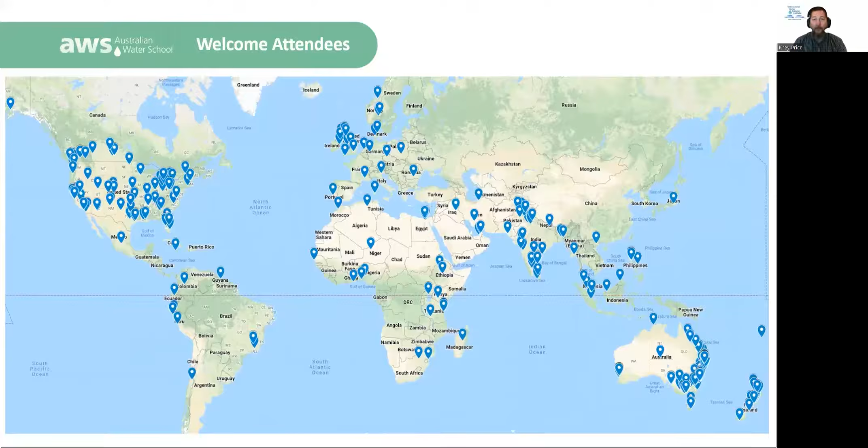We've got Ben and Carlos. Ben, Carlos, if you can turn on your cameras and say good day. What we'd like to know from you is, first of all, what's your background? What do you do? How did you get into this field of providing advice around flooded roadways? And let us know where you're coming to us from today. First, over to you, Ben. Hi everyone, thanks for joining us all. I'm from the Water Research Laboratory at UNSW Sydney, and I'm fascinated by anything to do with water, coastal hydraulics. I do a lot of work in those areas, and we have a team of flood specialists here. It was a really important part of our work to contribute to what happens to vehicles in floods, and helping ensure the safety of people around floodwaters.

Excellent, thanks for that. Over to you, Carlos. Let us know a little bit about yourself. Hi, how are you everyone? Thank you for the invitation to Australian Water School. I'm a hydraulic engineer working at the Queensland Department of Transport and Main Roads, and obviously floodways and low-lying crossings are part of the scope of work here. I've been around for a while, originally from Mexico, but I've been here for 20 years working in all sorts of hydraulics - bridges, floodways, dams, etc.

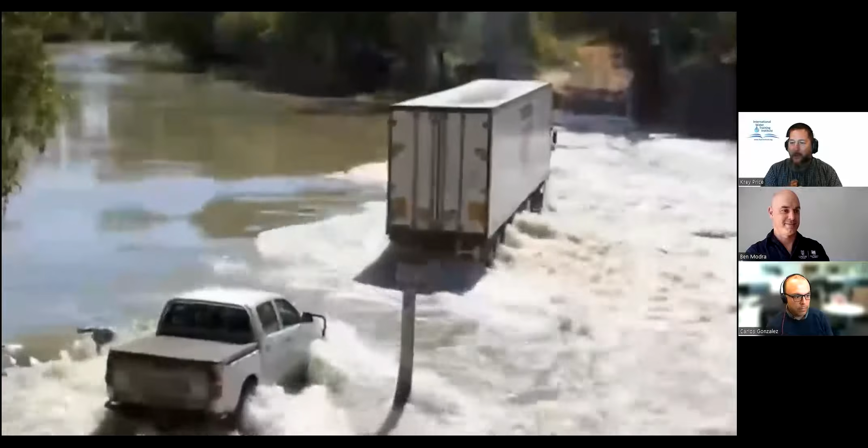So this is what we're talking about today: floodway crossings. To put an Australian context on it, let's start with this video, thinking about Ben's research and Carlos's thoughts on what it takes to move a vehicle. This is a uniquely Australian example—you do not want to get stranded here. Look at this person stranded in their pickup truck—guess who's coming to pick him up? This is a sightseeing tour for crocs, in the Alligator River, and they've probably found some out there. This is not where you want to get stranded.

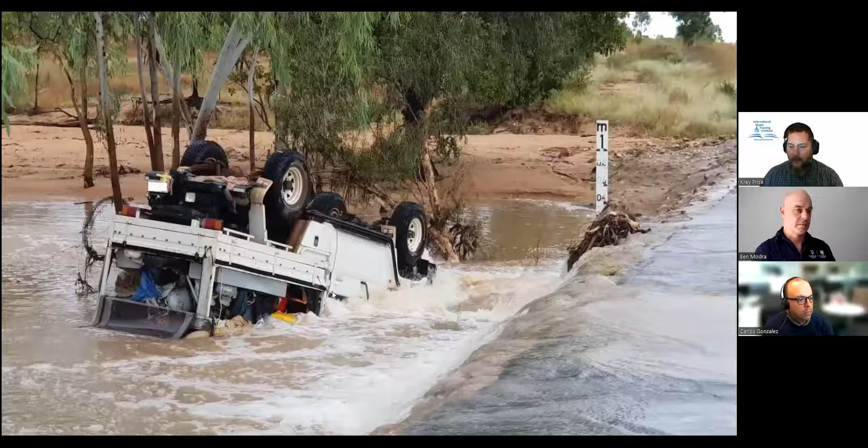We've got a few messages about the dangers of crossing flooded roadways, even when they stay intact—this is a police photo here in Australia. But when they don't stay intact, the problem is that looks can be very deceiving. You might think you can walk around in some flood water, and boom, he went completely submerged.

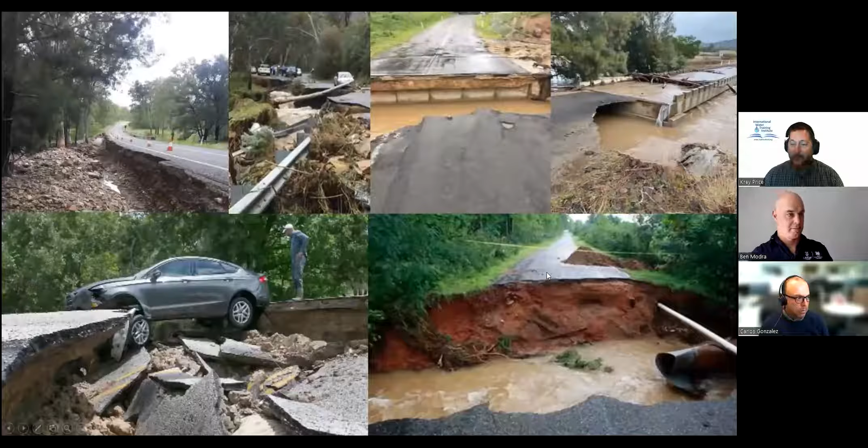After the flood recedes, there may be something like this to observe. But this might be happening under the surface as you look at it and decide whether or not to drive through.

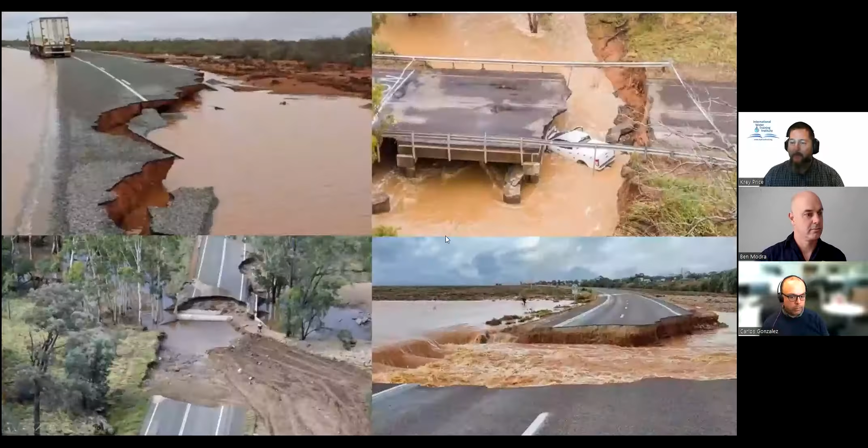So first, Ben's going to talk to us about examples of what it takes to float a vehicle. Then Carlos will talk about what it takes to design these crossings so that once the floodwaters recede, they're still intact afterward. So let's start with Ben.

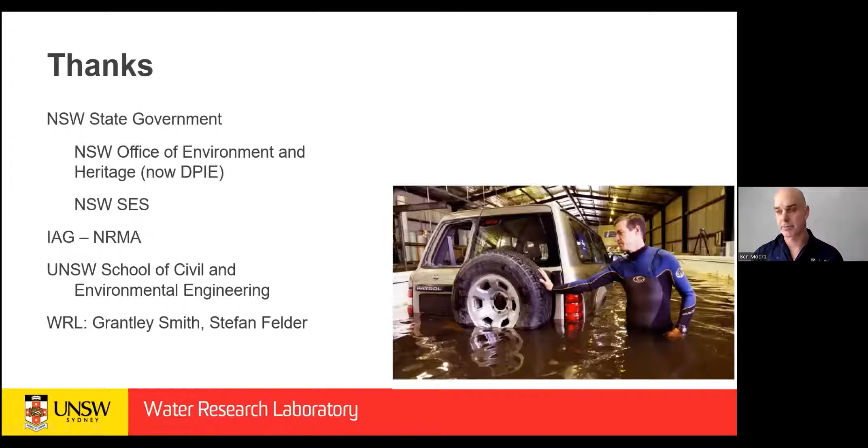I'll present some of the background, what causes the instability, how we formulated the problem of stability, the research and tests that we did on buoyancy and its effect on traction, hydrodynamic forces, and the outcomes of the study.

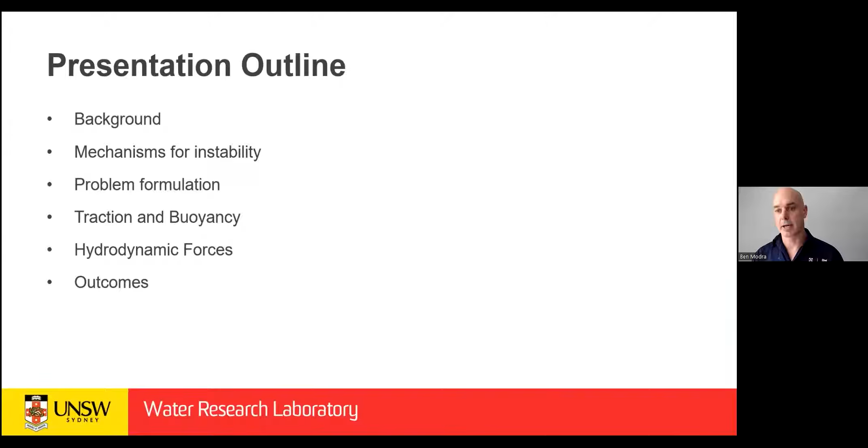I'm going to start with a little bit of a video reel here to show you some of the sort of get our heads in the right kind of space.

So what happens to a car when it goes into floodwaters? Well, we think of cars as these big, heavy, safe things that drive us around. In floodwaters, they float really easily. You've got this big cabin full of air, cabin and boot, which is very buoyant. The engine is the heavy part of the vehicle, so the front tends to sit quite low in the water, and the rear wheels lift.

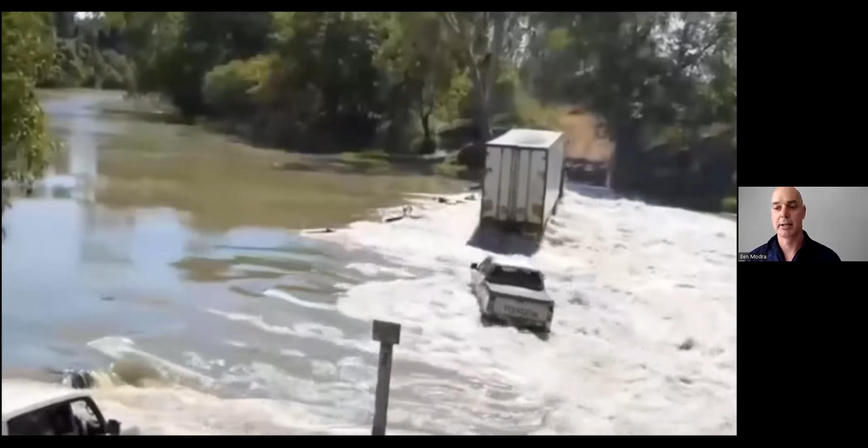Here's that same clip that we saw from the Alligator River. I really like this clip because it highlights a few things. One is that key mode of instability where the back of the vehicle begins to slide out. Second is just how little room there is for error. He's on this causeway, and as soon as the vehicle starts moving, he's in trouble.

Another thing is the size of the vehicles. You saw that truck go through very, very easily. So the mass and the height of the vehicle is really key to the stability of the vehicle, and also take note of this very complex flow conditions that you have here.

I've got quite a few videos in this presentation. I particularly picked ones where I knew that people were rescued and saved from their vehicle. Nobody was injured, so don't be troubled by that. There's certainly many people that don't have that. Flood waters are dangerous, and worldwide, lots of people continue to die by making these poor choices of driving through flood water.

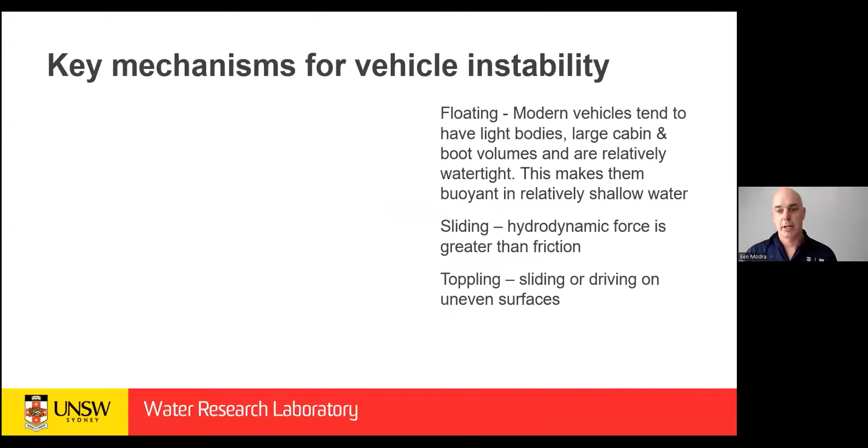So the key mechanisms for instability of a vehicle are obviously buoyancy of the vehicle, which means it can float. If you've got flows coming from the side, there's this hydrodynamic loading on the side of the vehicle, which means the vehicle will slide, so the hydrodynamic forces overcome the traction forces of the tyres. And if the road is at all uneven, or if there's potholes or damage to the road, you can have toppling of the vehicle.

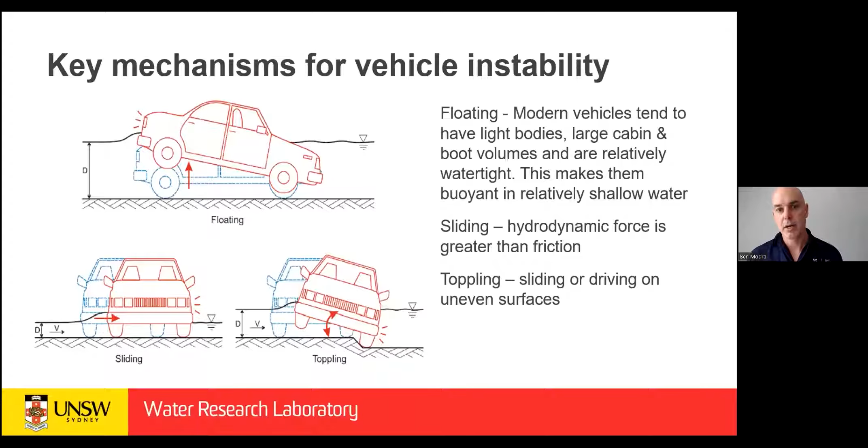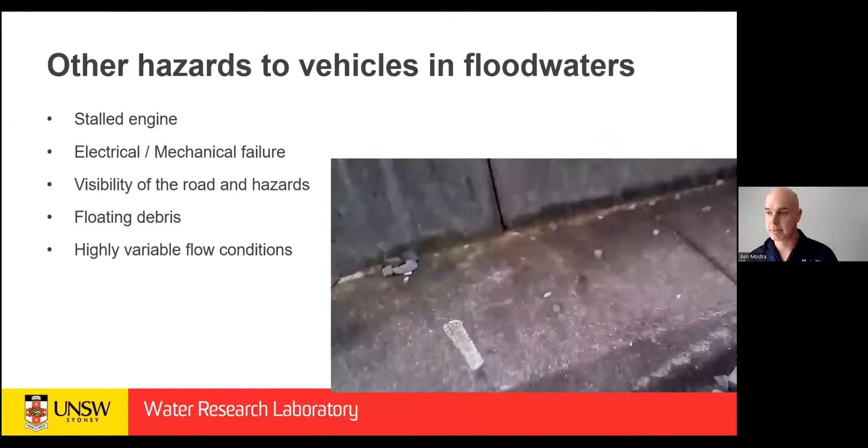There are a number of other hazards to a vehicle rather than just being washed downstream. You have a stalled engine, or an electrical or mechanical failure, which means the vehicle stalls and you have to get out and traverse the floodwaters on foot, which is a hazard in itself. There's also visibility of hazards, a real issue - you don't know where the edge of the road is, if there's debris, or even if the road may have been completely washed away. You don't know any of that, so that is a real hazard as well.

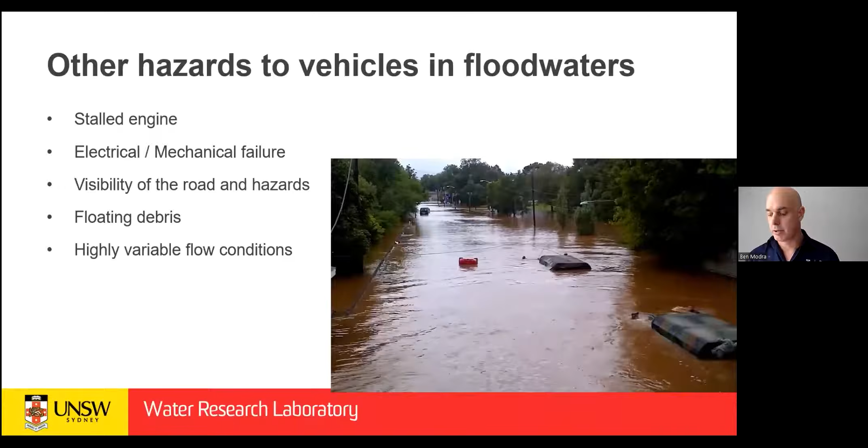Any debris - you can imagine a tree trunk floating downstream, impacting the side of the vehicle - is going to contribute to destabilizing that vehicle and having the potential for it to wash downstream.

There have been a number of previous studies. Here at WRL, we've got studies right back to the 60s. This was quite a seminal paper that led to the really early design guidelines for causeways.

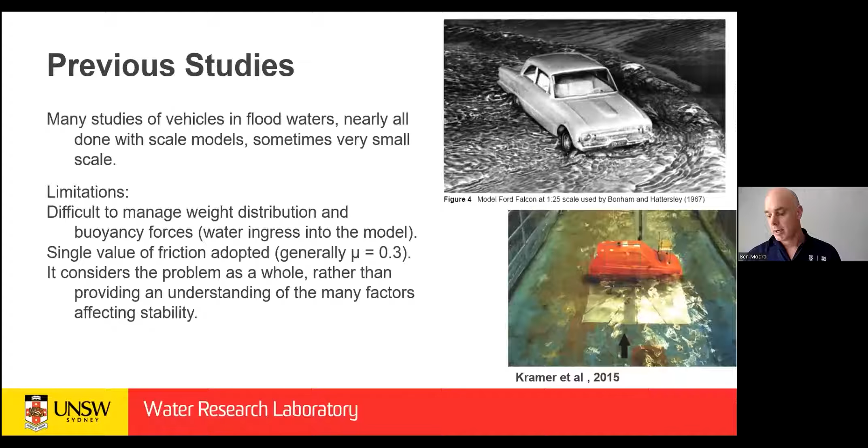But we wanted to approach the study in quite a different way. This resulted in a journal paper, which you can access. A real approach we wanted to take was to break the problem down into its component forces: what's the traction, how does buoyancy affect traction, what's the coefficient of friction, what's the hydrodynamic coefficient of drag on the vehicle. So we really wanted to look at all the different component forces that impact a vehicle.

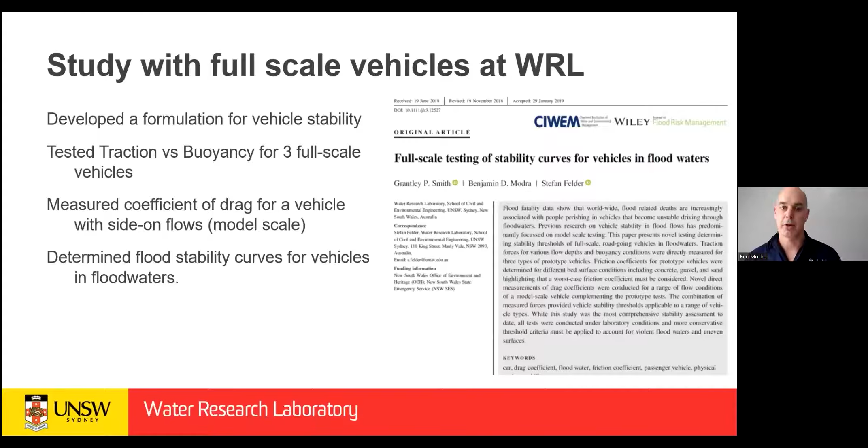At a very high level, it's a simple problem. When the force of the floodwaters on the side of the vehicle overcomes the traction between the tyres and the road surface, the vehicle will shift sideways.

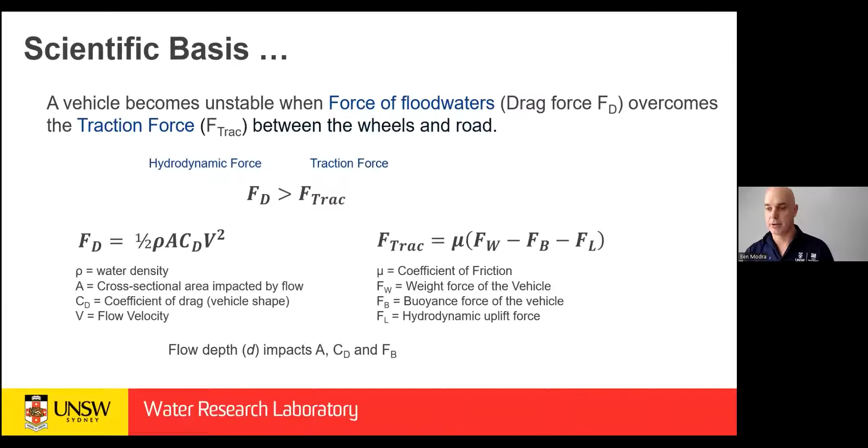There's a couple of key assumptions we made at the start of the project. Firstly, at that first breaking point, the point of losing traction, we said that the car had failed and has the potential to be washed downstream. That doesn't always happen - sometimes a car can shift slightly, regain traction, and drive off and survive. But for the sake of this study, thinking broadly about stability of vehicles, as soon as that vehicle loses traction, we consider that to be a failure.

Because the rear wheels have so much less traction due to the buoyancy of the vehicle in water, we're really focused on what happened at the rear axle.

We also considered - if you cast your mind back to those videos - all of those videos showed the cars trying to traverse directly across the channel. Our causeways and bridges are constructed to be perpendicular to the river. You're really trying to get across to the other side as fast as possible. Anybody driving in floodwaters doesn't want to be there - they're just trying to get to the other side as fast as possible. So we only considered perpendicular flows to the vehicle.

There are other studies out there which look at different things.

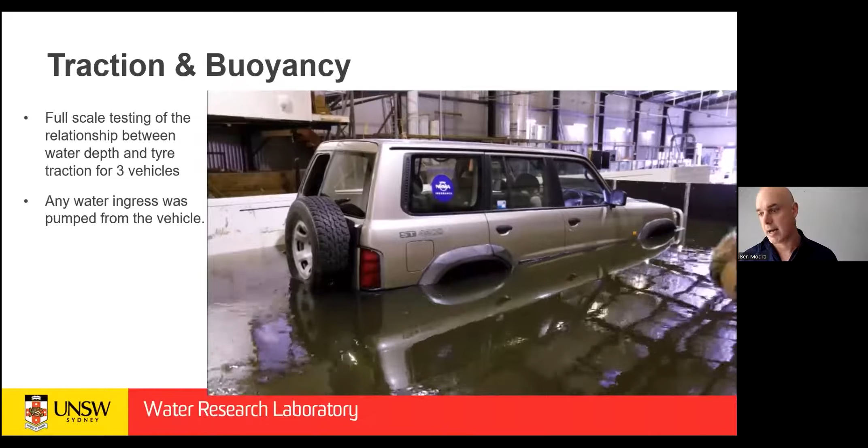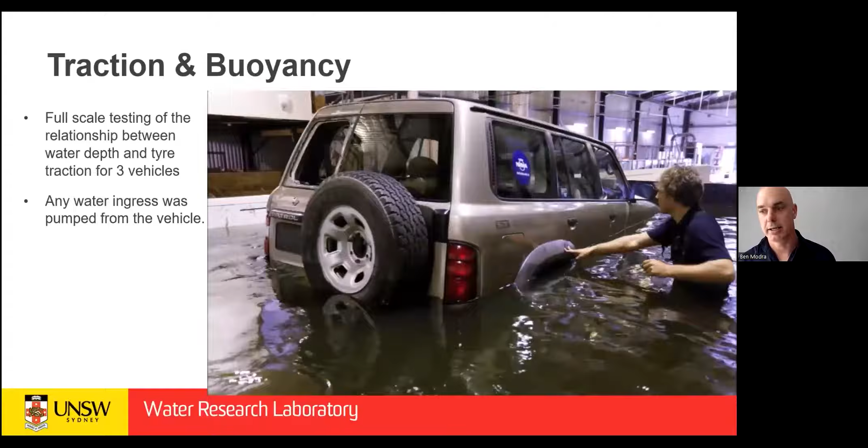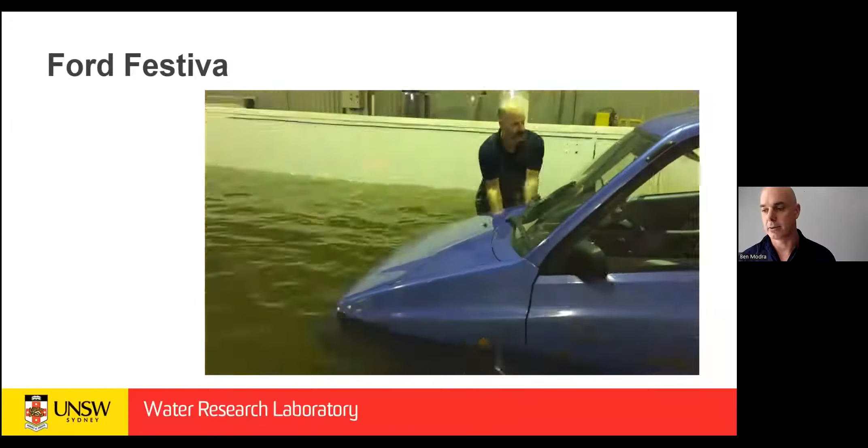So this is basically what our study looked like. We have a vehicle in a tank. As you fill the tank with water, the vehicle begins to unload off the springs, and if you get deep enough, someone can just get in there and push the vehicle around really easily. If you go a bit deeper - this is a smaller vehicle, so the water depth isn't as deep as it was for the four-wheel drive - you can also get the front of the vehicle to move around really easily as well.

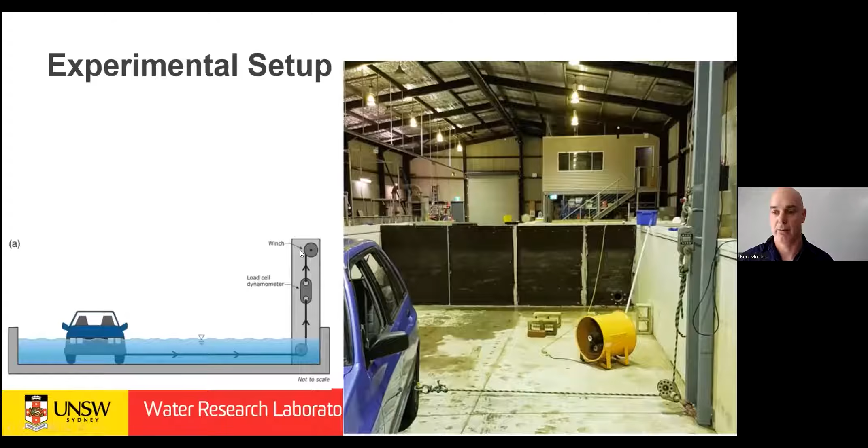Our experiment, the first part looking at buoyancy and traction, started with this setup. We have a winch at the top here, a dynamometer hooked up to a logger, so we're measuring the loading over time, which is hooked up through a pulley to the rear axle of the vehicle. We're basically pulling the vehicle to the side and seeing what force is there over a range of depths.

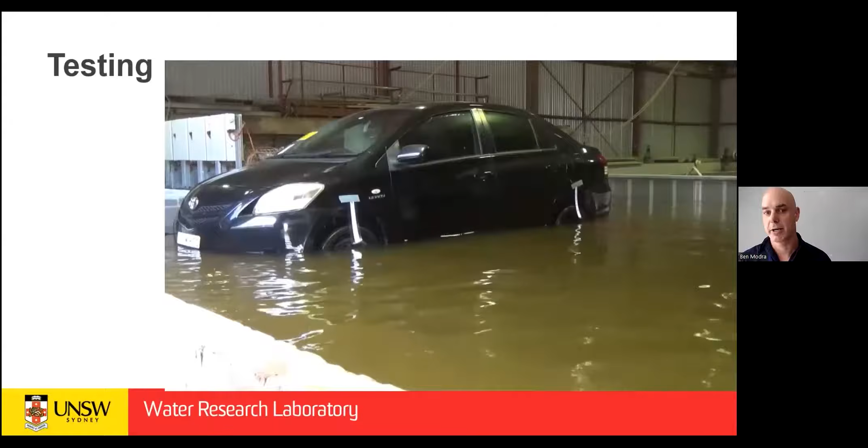This is just a quick shot of that experiment. It's really quick, only happening over a few seconds - we're just looking at that tugging of the vehicle sideways.

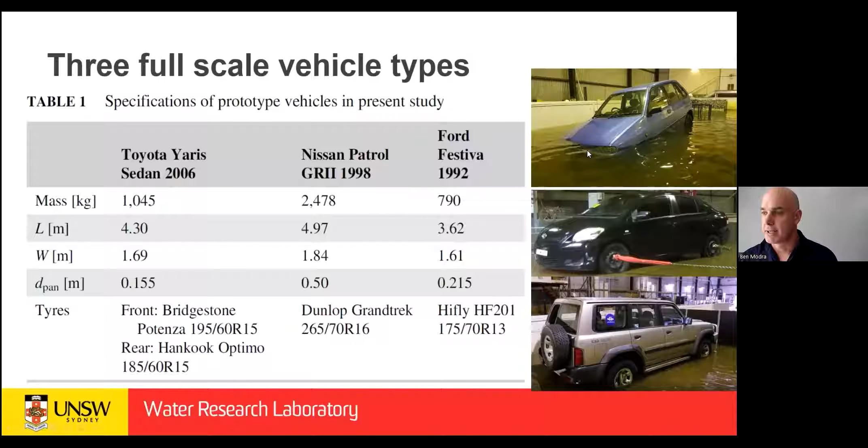We did that across three different vehicles: the Yaris, a pretty standard four-door sedan; a very large four-wheel drive, obviously very heavy with a very high pan level - the pan, which I'm going to talk about quite a lot, is the bottom of the cabin of the vehicle, so when you're sitting in your car, it's what your feet sit on; and the Ford Festiva, another very light vehicle that sits up a little bit higher than that.

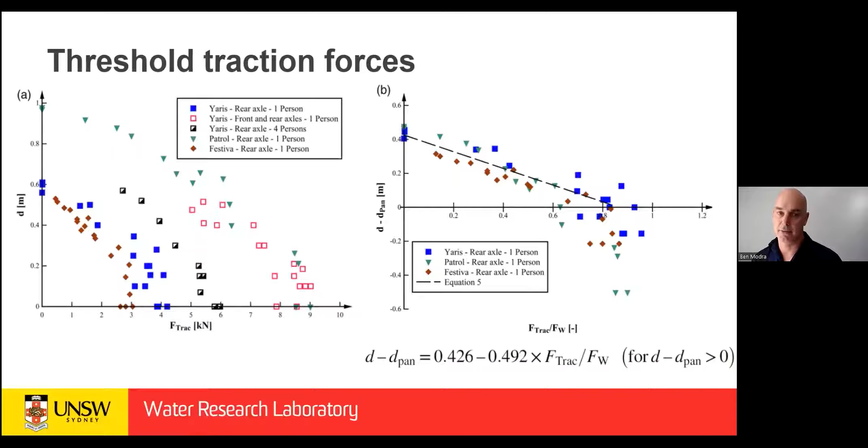Another key thing we looked at early in the study was the coefficient of friction between the tyres and the road surface. Floodwaters mobilise a lot of material - dirt, sand, gravel, debris, leaves, tree branches - and particularly with a causeway, where water comes from the channel up and over, it brings a lot of material onto the road. This can cause a dramatic reduction in the coefficient of friction.

So we had a little look at that, testing a number of cases, particularly gravel and sand behaving on concrete. This was a small part of the study, and I think it needs a lot more effort, but the early work by Bonham and Hattersley at WRL came up with a conservative value for coefficient of friction of 0.3.

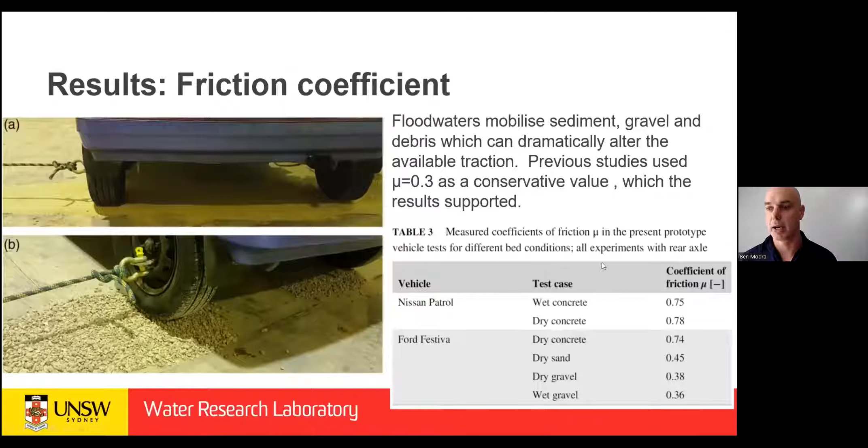That value has been used across a number of studies, and the work we did here basically confirmed it was a suitably conservative value, though I feel we need a lot more work to fully understand that.

So we've developed this body of information about buoyancy, traction, and coefficients of friction. Now we wanted to look at the hydrodynamic loading on the vehicle. There's already a lot of information about the coefficient of drag of a vehicle driving through air, since people are clearly concerned about vehicle efficiency.

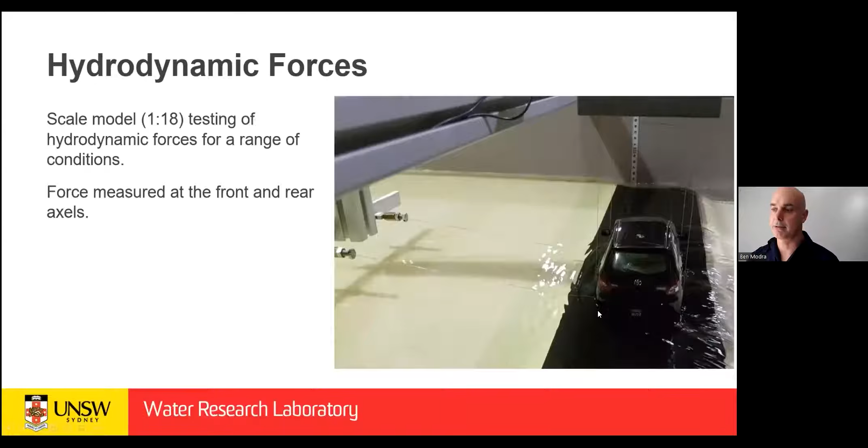But what happens when flows hit the side of the vehicle? There's very little information out there, or I couldn't find anything, and also nothing on what happens with water flows that only impact part of the vehicle. So we were really interested in measuring the coefficient of drag of a vehicle exposed to flows coming from the side.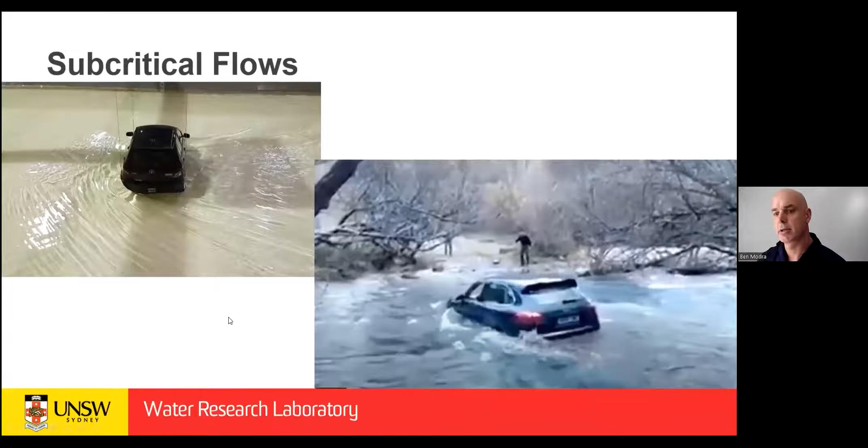We tested this across a number of conditions: subcritical flows, where you've got deep and slow-moving water, and supercritical flows, which are very shallow and fast-moving.

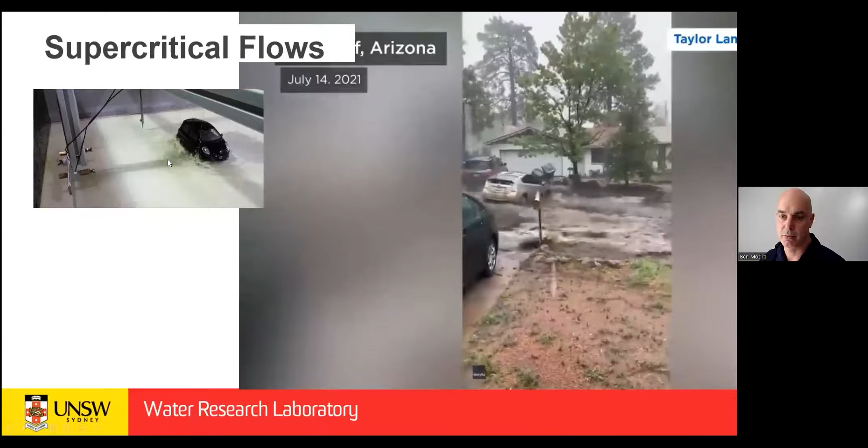Supercritical flow tends to occur on fairly steep sloping roads like this, and you can see the water piling up against the side of the vehicle as it impacts it - something we also observed in the physical model.

The last condition is near-critical flow, which is typically what you get over a broad-crested weir, such as on a bridge or causeway, producing this kind of undular flow. We tested a similar situation in the physical model.

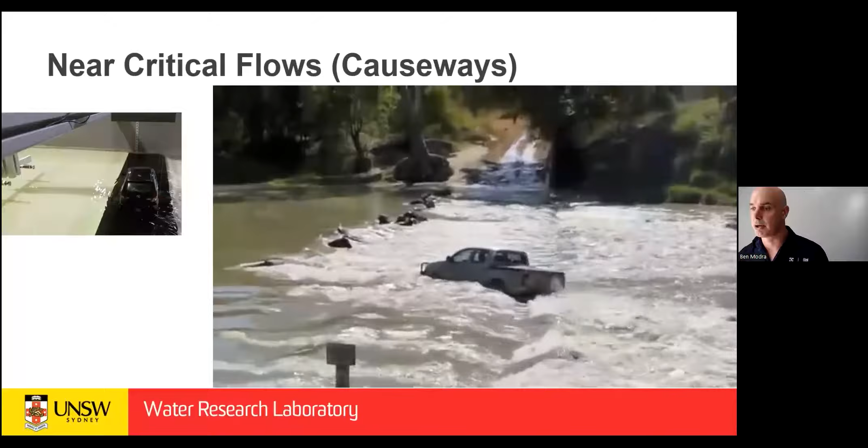From that, we put all those results together and compared them to try and get a suitable coefficient of drag that we could use for the rest of the study. We can see that for supercritical flows, they're quite constant throughout a range of Froude numbers.

Near critical flows as well, we get a bit more scatter with the subcritical flows. That probably points to what's happening to the vehicle when it's very deep, where you might get a lot of variability. Supercritical flows tend to be very shallow, so you're only talking about a small part of the vehicle. Subcritical flows might impact quite a lot of the vehicle, up over the bonnet and things like that, so you might have quite a different coefficient of drag there.

We also looked at how it relates to Reynolds number, and you can see that supercritical, near critical, and subcritical all tend to plot quite closely on this figure. So there's a nice, neat relationship between those, and it increases up to about a Reynolds number of 15,000 and drops away slightly. From this, we took the average value of the drag coefficient and used that for later parts of the study. That's a real key outcome, because there's very little information out there on drag coefficients of vehicles in floodwaters.

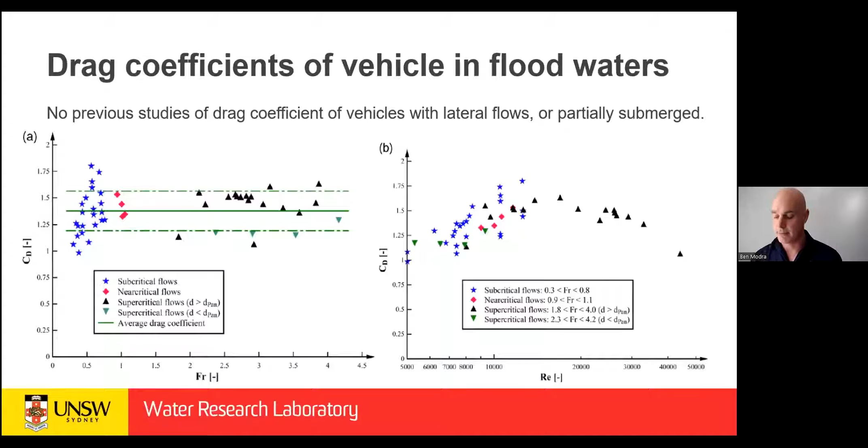One of the real motivations for this project was to confirm the available Australian guidelines for the safety of vehicles in floodwaters. So here we have our Australian Rainfall and Runoff guidelines for a small vehicle, that's this dashed line down here at the bottom, and for a large four-wheel drive here.

Using the coefficient of drag that we developed from our model, and a coefficient of friction, taking a reasonably conservative value, we plot out the results of our traction tests on that. What we'll see here is that our Festiva with the brown squares and our Yaris both sit comfortably above the guideline value for a small vehicle.

So the question is, do we need to move that line? Well, there's certainly nothing from this study which shows that we'd need to move that line down. Those two vehicles are both reasonably small vehicles, and they're sitting comfortably above that line. So there is space to work there with other vehicles.

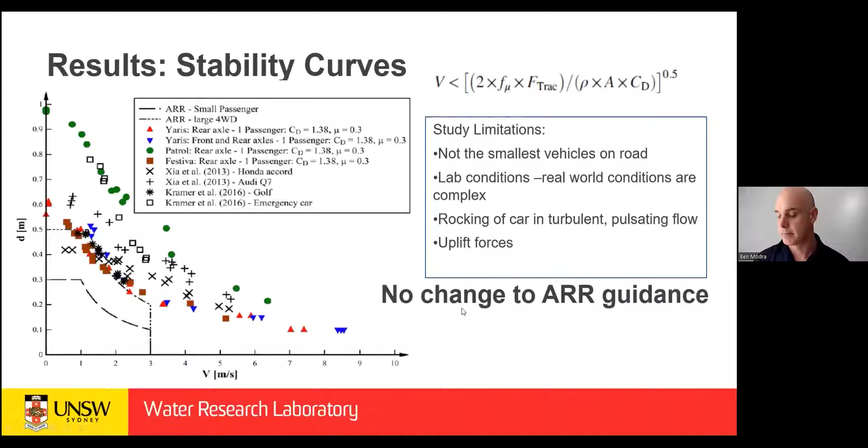Again, Stefan reduced those stability curves down to a non-dimensional value. So we're looking at Froude number on the x-axis, and again the depth of water above the pan of the vehicle. Surprisingly, those results collapse down to quite a tight spread of data for the three vehicles that we tested, and so we end up with a good general equation for the stability of vehicles in floodwaters.

I'm going to leave it there. I hope I've got across some really key points. One is that the stability of the vehicles is really dramatically tied to that pan level of the vehicle. Once the water starts to touch the body of the vehicle, you very quickly start to have an unstable vehicle. That's probably one of the key take-home messages that I took from this.

Excellent, thanks so much, Ben. Carlos can join us here in the background as well.

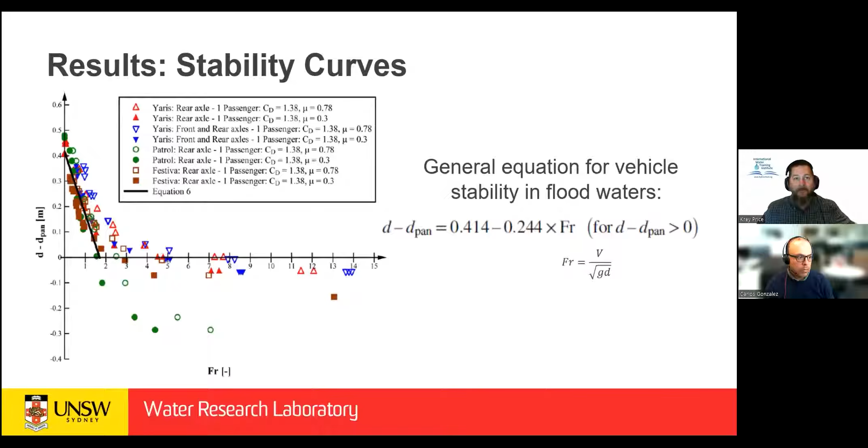Okay, thank you so much once again for having me. Today I'm going to talk about - we already covered what happens to cars in floodways - I'm going to talk about the floodway itself. My presentation will cover a quick definition, what are the current guidelines in Queensland, how do we design floodways here, and what is there to watch out for. Then I will touch on two focuses that we take in design.

One is resilience of the floodway itself, and another one is serviceability. As I said, we do not advocate crossing floodways, so the roads are usually closed once they get water over it. Finally, I will conclude with some other considerations that need to be taken when designing a floodway.

So floodways are road sections designed to be overtopped by floodwaters without losing or compromising any structural integrity. The immunity of these crossings could be really high, but usually even all the way to 5% AEP, or 1 in 20 ARI for non-Australians. But effectively, at any point, any crossing can become a floodway, especially in large floodplains where you experience large and extreme events, as we are experiencing in Queensland. So I'm going to talk a little bit, not just about floodways, but really low immunity level crossings.

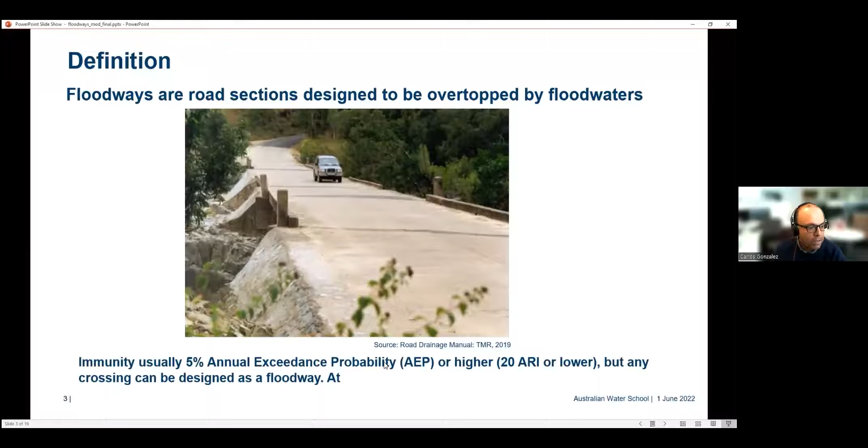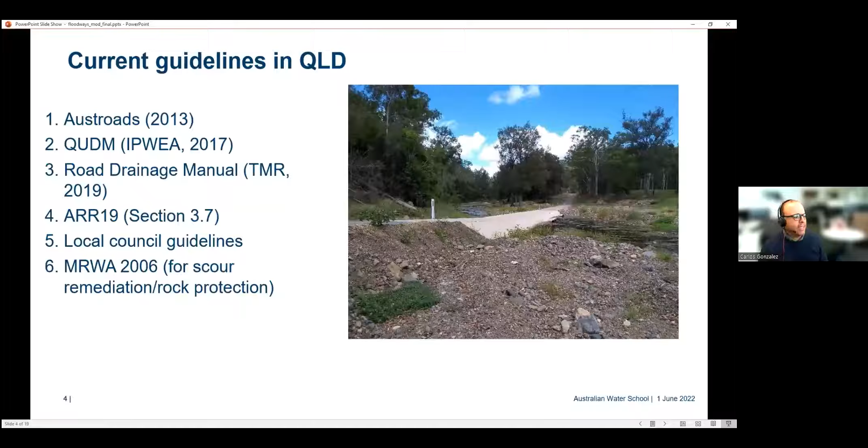So yes, a floodway can be designed using first principles - weir equations, culvert equations, quite simplistic, as every single guideline in the state indicates. However, the reality is that we mostly do it using either 1D or 2D models these days. Why? Because 2D models actually present a better representation of overbank flows, multidirectional or skewed flows. However, we need to be very aware that 1D models are depth and width averaged, and 2D models are depth averaged. Because of that, you need to take into account factors for variations in velocity. You need to be aware that the velocity definitely changes across the floodway. So first principles are still very relevant, and I recommend using them at least for checking your modeling results.

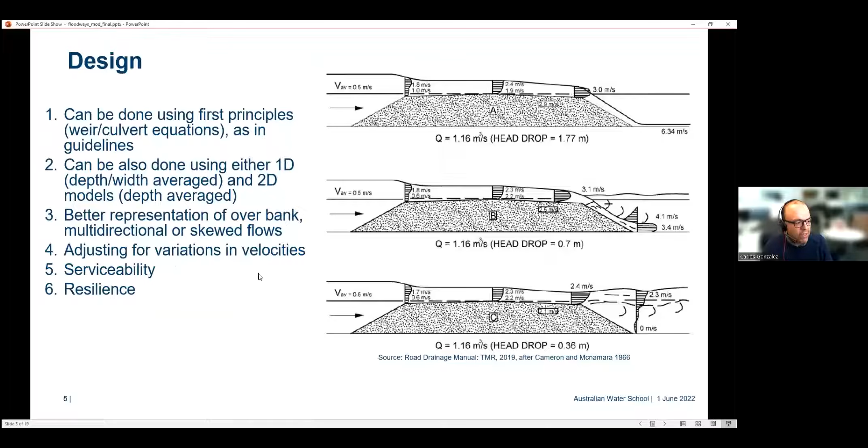So as I said, in Queensland we focus on two aspects of the crossing: resilience and serviceability. I'm going to be talking about this in the next slides. First, resilience - structural integrity of the floodway itself. We don't want the floodway to be washed out by any flood. We have criteria, and I believe that's all the way to 2% AEP, in some cases all the way to 1% AEP, where we do not want the integrity of any floodway to be destroyed.

So guidelines currently say that minimum protection is grass batters. However, I hardly see any of those floodways anymore - only in really low flowing causeways, really small ones. So the five famous types of floodway design, back from the US Highway Administration, are still relevant.

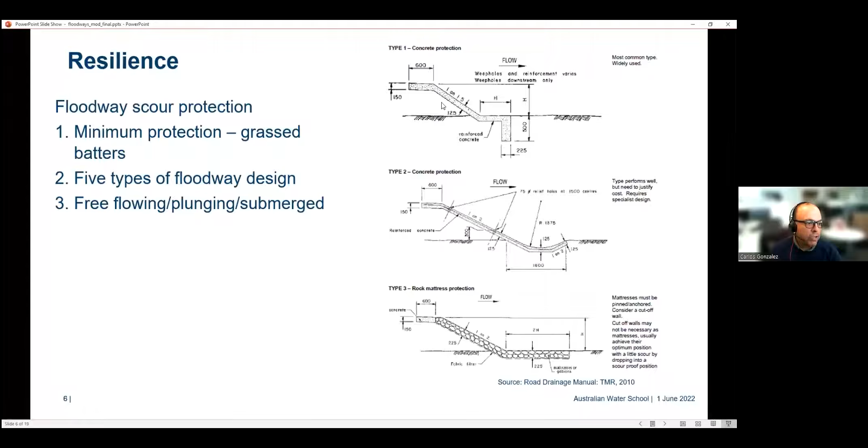Probably the most common one, and most popular here in Queensland, is type 1, which is effectively a reinforced concrete floodway. All these designs are similar, however they rely on the conditions of your flow. Is your flow free flowing? Is it weiring? Is it plunging downstream of the flow? Is it submerged? So depending on your conditions, you can vary from type 1, type 2, type 3 if you don't want to go concrete, and then there's your type 4 and type 5.

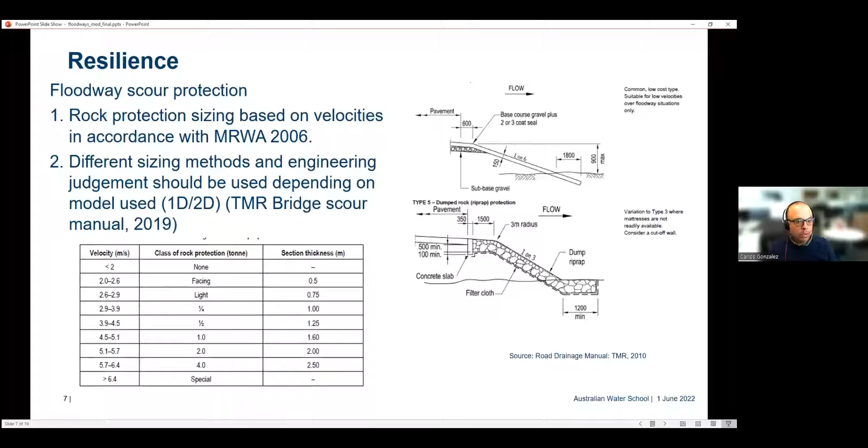As I said, in terms of rock protection outside, upstream and downstream of the floodway, there are different guidelines. Currently, guidelines point to the Western Australian guidelines, but we actually recommend different sizing methods and using engineering judgment, because all these equations and tables provided in the guidelines are based on average velocity. So if you have a 2D model that more accurately depicts a maximum velocity, you need to use your engineering judgment to see what velocity you're going to use for designing your floodway.

So that's in terms of resilience. We don't want the floodway to be washed out. In terms of serviceability, in Queensland at least, it's a big issue when floodways or really low-lying roads are inundated for a long period, because they do impact the cost of transport of goods, and also have a social impact on people moving between places.

Because of that, we focus a bit on time of submergence, which is the period of time that the road is inundated during a flood event, no matter the depth. It's expressed in hours, and we also use AATOS, or average annual time of submergence. We use these two parameters to try to come up with the effect of flooding, not only with respect to stability of the embankment and pavement, but also the consequence and maintenance cost. They're also very important to consider for delays to traffic and the inability to communicate for societies, whether that is acceptable. Because of that, the Road Drainage Manual in Queensland presents a methodology.

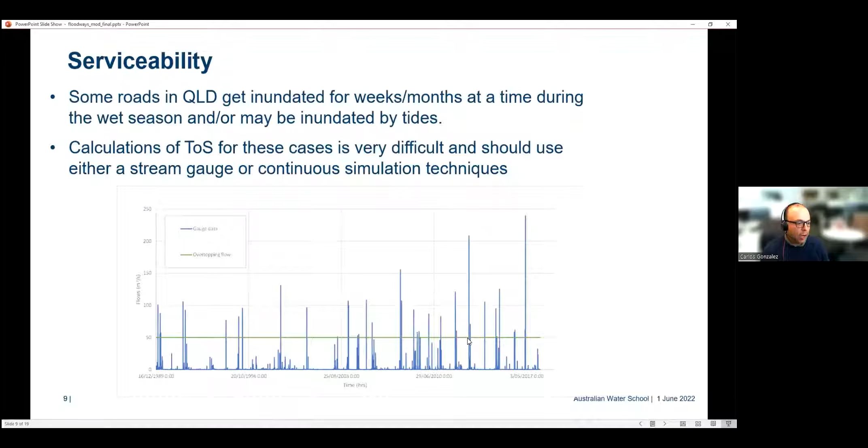If you have a gauge, or you can perform a continuous simulation technique, then you are much closer to reality. However, there are ways to calculate TOS and AATOS that, although they might not be exactly what the road experiences, at least allow you a comparison, giving you a parameter to see how bad, in terms of time of submergence or immunity, your road is.

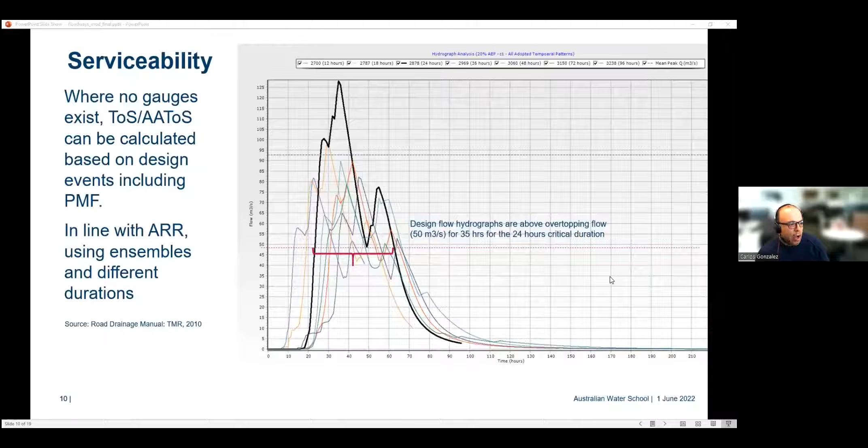As I said, the Road Drainage Manual presents a methodology now in line with the ARR 2019, using all ensembles, and effectively recommends using all durations, looking at your hydrology for all durations, and then for all your durations, trying to understand what is the largest mean time over your threshold flow. So you know your threshold flow, or your overtopping flow, at each crossing. Normally when you do your hydrology model you focus on peak flows, but this method recommends not focusing on peak flows, but on the mean time of submergence.

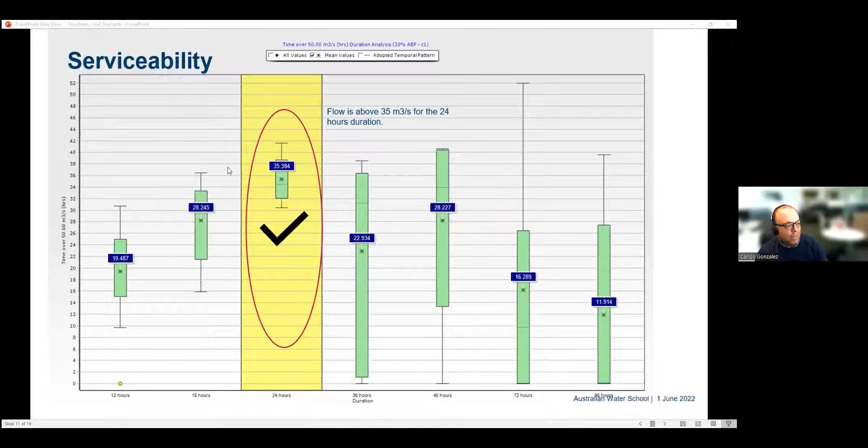It's important here, when using this theoretical method - it's been around for a long time, since Austroads publications back in the day - but when using the new ARR 2019, it's important to make sure that the time of submergence monotonically increases with event magnitude. What I'm saying is that it does not make sense to get a time of submergence smaller than for a larger event. So in those cases, you might need to look not at the critical duration, but at alternative durations that might give you the worst mean time over threshold.

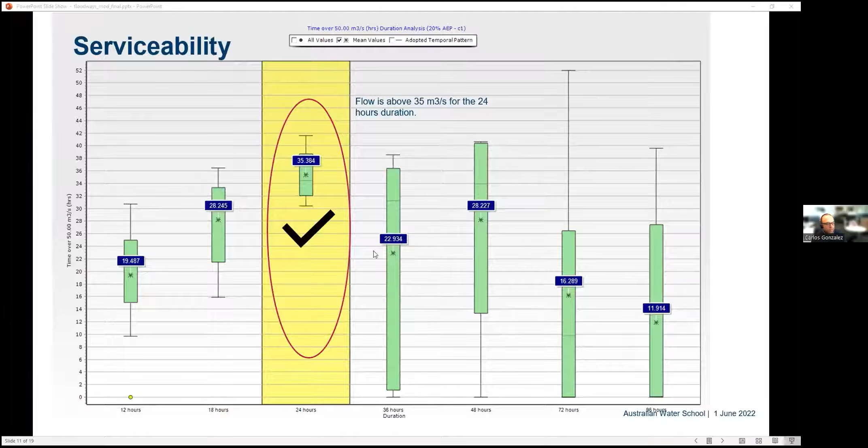So once you calculate your time of submergence for different events, including the PMF - however, the PMF has very little influence in this method, so it's okay to extrapolate it - once you do that with a probability density function, you can come up with your estimation of AATOS.

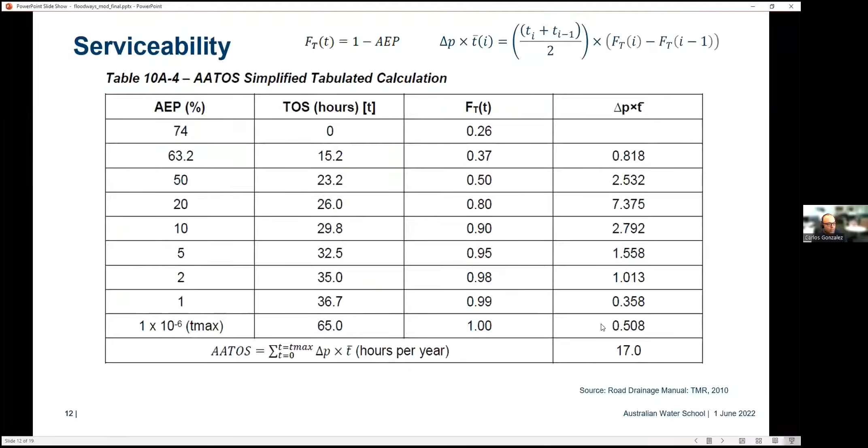With those two parameters, we recommend looking not only at the one crossing. If you're only looking at one crossing, so be it, but in terms of connectivity, we actually recommend looking at a given stretch of road. Why? Because in places they're close by, they're not independent, so they're likely to be dependent. When making decisions about what to upgrade, it's a great tool to know which is the low-hanging fruit. We call this kind of analysis flood link studies.

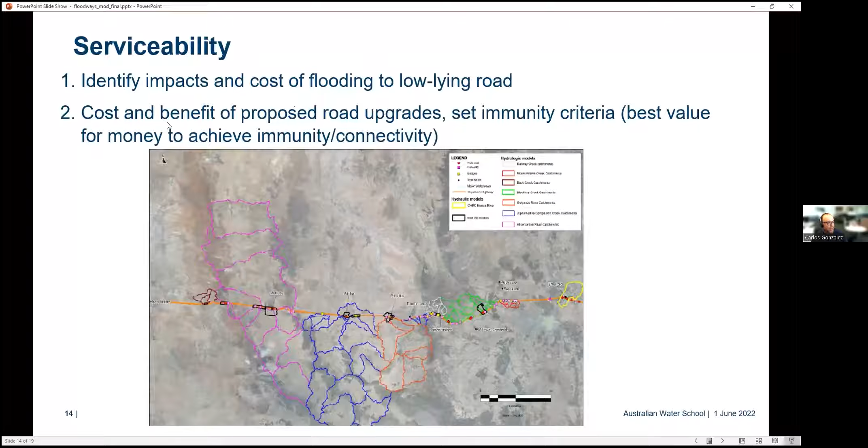As I said, they're not restricted only to floodways, but also to really low-lying roads, of which we have a lot in Queensland. So these kinds of studies allow us to identify impacts and cost of flooding in low-lying roads and communities, and also cost and benefit of the proposed road upgrades.

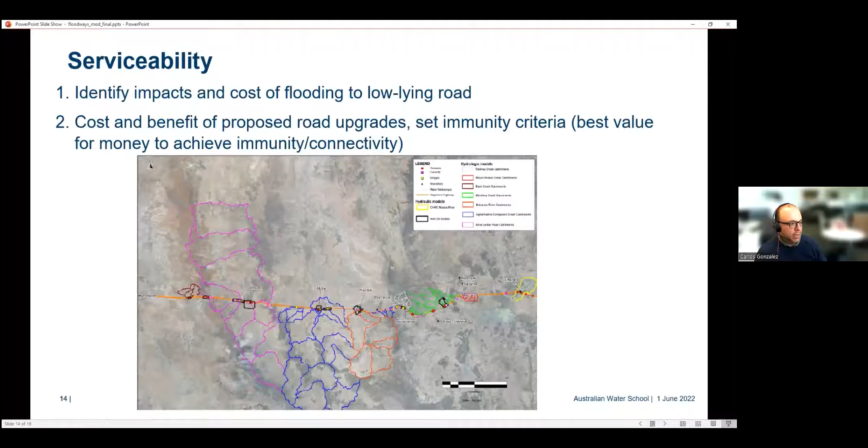A question I get asked all the time is, which is the immunity criteria? Well, there's no standard. Depending on your location, you need to set an immunity criteria, because in some locations you need to achieve best value for money. There are always monetary constraints, but what you want is to always achieve best value for money with hydraulic performance and associated cost.

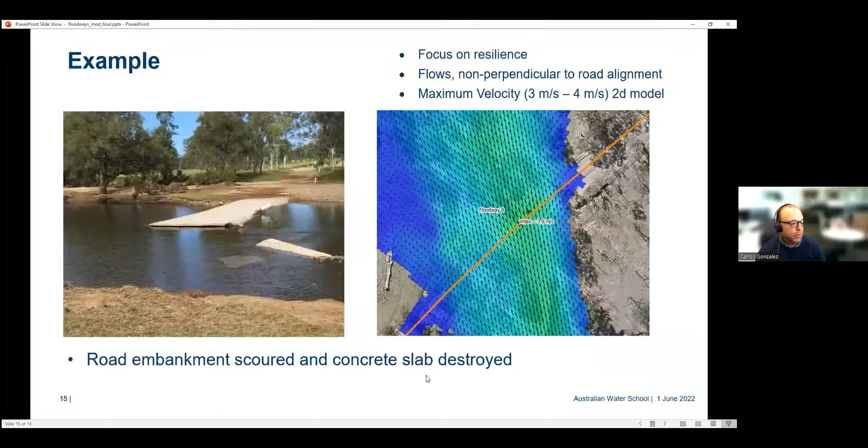Very quickly, I'll go through an example. After Cyclone Debbie in 2017, we had a lot of damage in the Gladstone region. This is one of those floodways that were redesigned focusing on resilience because they collapsed and were damaged. In this particular case, we had velocities of 3 to 4 meters per second based on 2D models. Road embankments and concrete slabs were destroyed. I'm mentioning that because it's also important to think about the approaches, not just the floodway itself.

This is a photo of the same floodway after restoration. In doing this remediation, we couldn't really improve the immunity a lot, but we slightly improved it to focus on getting shorter times of submergence. We used a concrete floodway type 1 and heavy scour protection, heavy rock rip-rap scour protection. Importantly, we also used an innovative approach called foamed bitumen, which is a methodology that allows a more flexible, more flood-resilient pavement to be used in the approaches. This is a sealed road, so you see the floodway, and then the path of the sealed road extends way beyond the floodway.

Why? Because this damage actually happens in extreme events. So you need to think about how big your large event is going to be, to guarantee the integrity not only of the floodway but the connectivity of the road as well, and of the approach embankment.

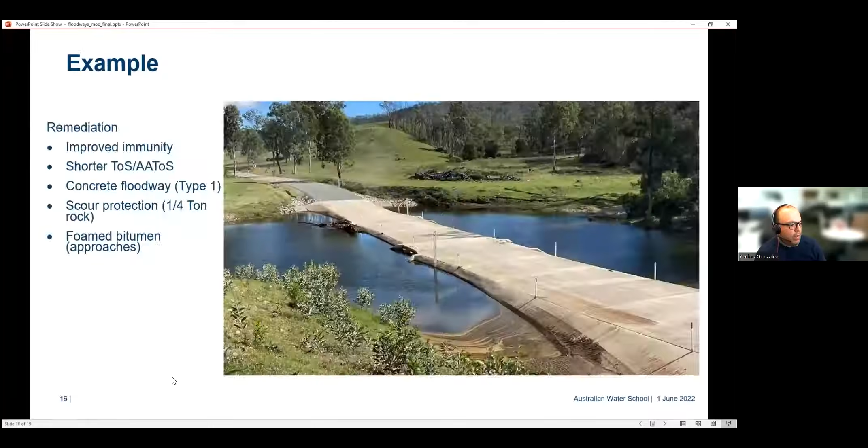Here's a quick video of how it looks now. So much better. We also had some big floods earlier this year, and it held up well. We're really happy with that.

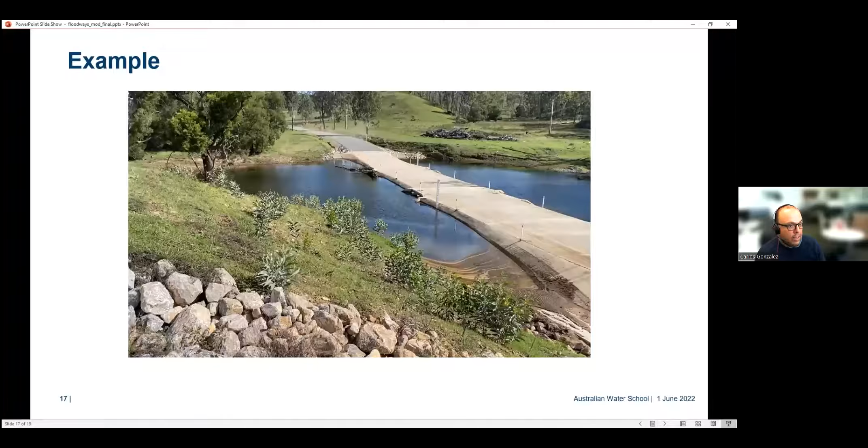I'll leave it there, and I'll touch on other considerations for designing a floodway. At least in Queensland, you need to take into account fish passage within the stream. You need to look at your river morphology, see what's happening with your banks, to make sure the river isn't moving on you, and you don't end up with large scour in the creek itself.

When you do a design, look at your remediation measures and your extent, not only for small events but also try to consider large to extreme events and the effect of climate change. It's a big topic, so do take it into account — we do take it into account here, and it definitely has an effect.

Finally, safety of design and operation is important. Here, there's a big safety media campaign: if it's flooded, forget it.

I'll leave it there with one example — this isn't a floodway, but it's very similar. This is central west Queensland near Boulia, with kilometers of road inundated for months. So all these design considerations are relevant in this kind of infrastructure as well — do take it into account.

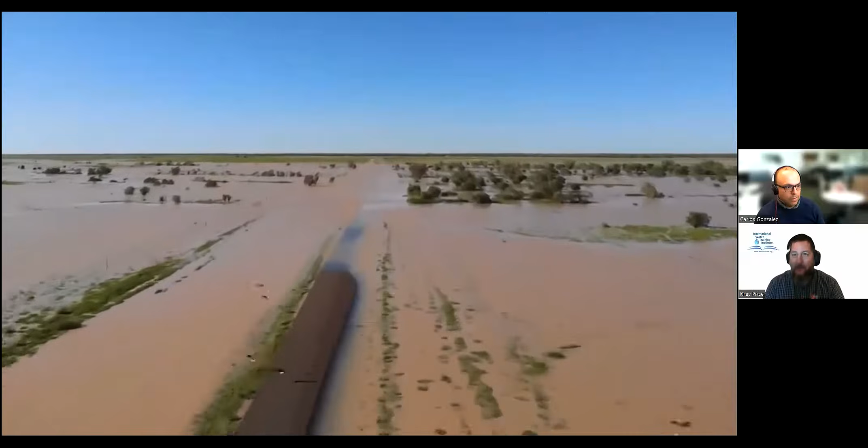What you'll see in the background here is the video that Carlos was referring to. Keep in mind how you would try to provide flood immunity out here when it's submerged for this long. That mandate not to cross a flooded road would essentially say this road is unusable for that amount of time. Keep those things in mind. We'll have some clips running in the background here.

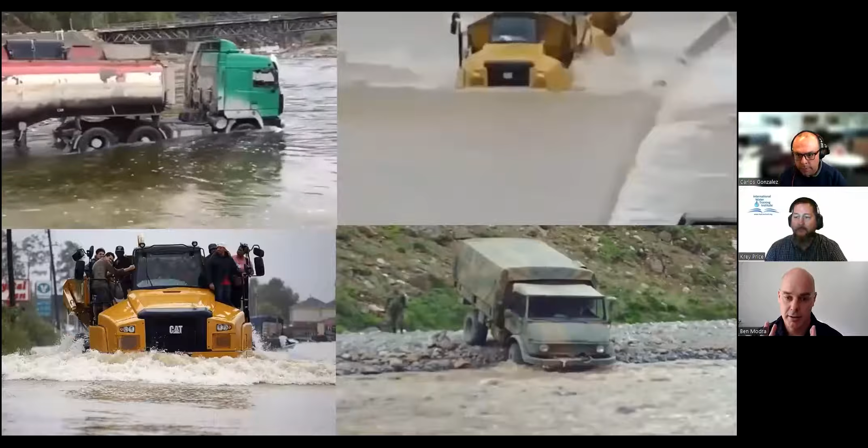The first message is always: don't drive in floodwater. It doesn't matter how you set up your vehicle, whether you're trying to get guidelines in place for safe design of vehicles in floodwaters, whether it's an electric vehicle, or front wheel drive or rear wheel drive. That all does matter, but the key message is always don't drive in floodwaters. It's just not safe. No matter how well you design the vehicle, there's still the potential of being washed downstream, which is the worst case scenario.

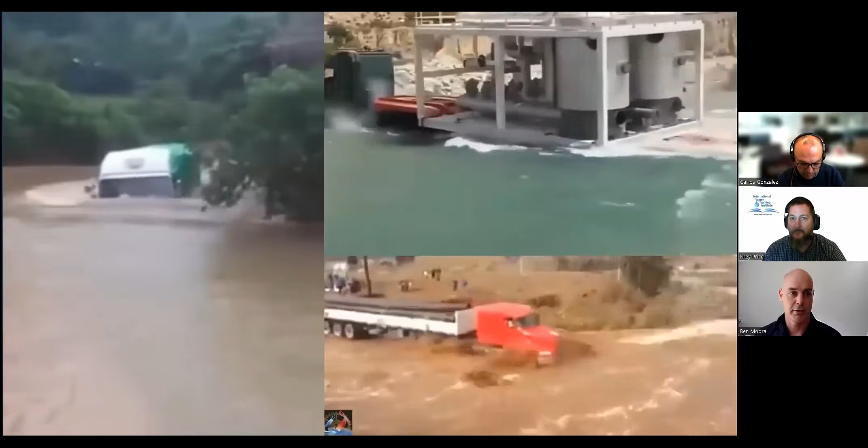There was one about rear wheel drive versus front wheel drive. Clearly, if you've got the engine at the front of the vehicle and it's very buoyant at the back, having rear wheel drive means you've got the potential of completely losing all that drive traction.

So that's an issue. Another one, there were a couple of questions around the velocity of the vehicle - maybe I didn't express that very well. The flow velocity is really important, and the loading on the vehicle increases with velocity squared. So if you double the flow velocity, going from 2 meters a second to 4 meters a second, you've got 4 times the loading on the vehicle. So velocity is really important, and that's a massive problem for us in the field.

I work in the laboratory and see flows every day. I couldn't walk down to a stream and tell you whether the flows were 2 meters a second or 3 meters a second. It's really hard to judge.

Again, it comes down to: don't drive through floodwaters. But for professionals that need to, for emergency services, they do at times need to do it. They've got large, well-equipped vehicles, highly trained crews, and they need to save people's lives, and they've got the equipment to do it. It's really important that we give them the right kind of tools to measure that velocity so they can assess whether it's safe for them to go into floodwaters.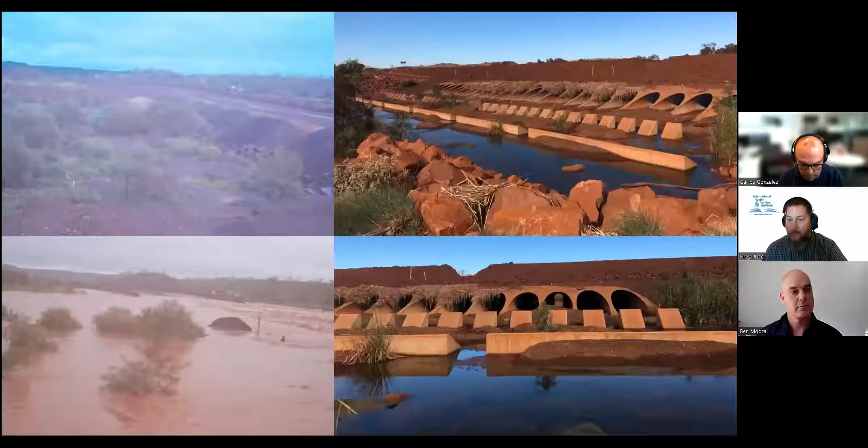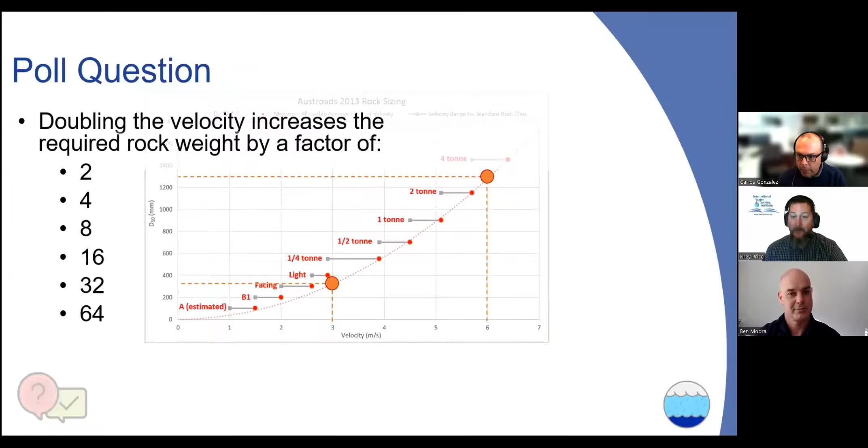No, excellent, thanks for that. I might highlight a webinar we did a few months back, where I'll put a poll question up and remind everybody what happened. When we asked a couple of hundred practicing professionals in the water sector - this had to do with rock sizing, but think about what it takes to move a particle. As Ben mentioned, doubling the velocity squares the diameter of material you could move. But how does that affect the weight? We asked this question to the audience, and everybody got this answer wrong. Not a single attendee got this question right, and that is a factor of 64.

It is the cubic quadratic, and it is raised to the 6th power. So the size of a vehicle that you could potentially move with increased velocity is certainly very sensitive to that.

Carlos, in the background, anything you wanted to cover that you've answered on the chat line for us? Yeah, thanks. There's a couple of questions regarding floodway design. One is what standards will be used for culvert fish passage in this kind of structure.

Here in Queensland, the Department of Agriculture and Fisheries has guidelines relating to fish passage in culverts. They state that velocities larger than 0.3 meters per second restrict passage of the smaller species of fish. So DTMR has standard treatments to implement in these kinds of culverts where fish passage is an issue. Most of them consist of implementing baffles into culverts. There's other groups, like UNSW, doing good work looking at other devices, but so far the standard treatment here is using baffles to create extra roughness and more opportunity for fish to avoid the larger velocities within culverts.

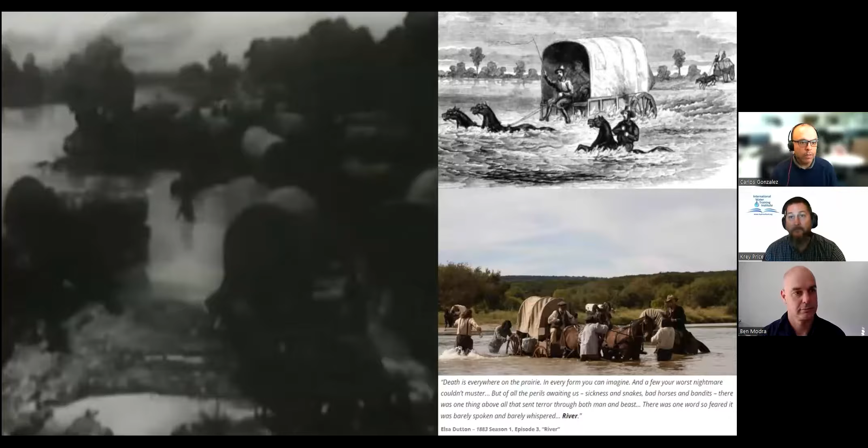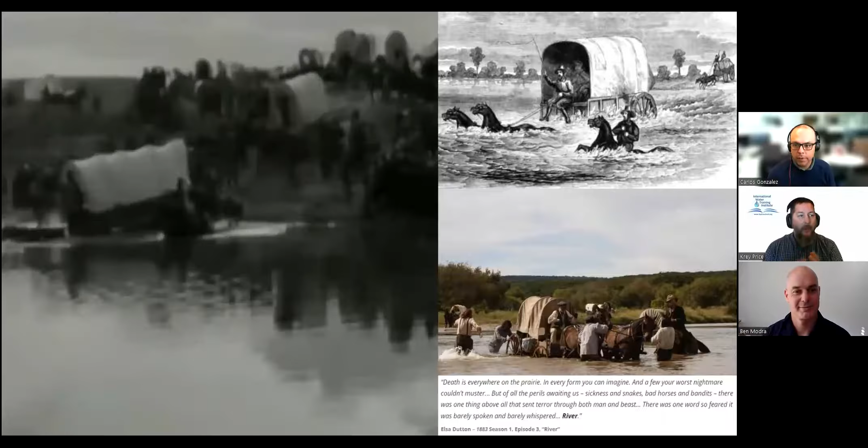If you can take what you've learned from Ben and Carlos, try to predict with some of these cases - motorcycles, trucks, buses, emergency vehicles - which one is going to make it and which one isn't. Don't test that yourself, as Ben mentioned. We don't want anybody pushing it here, and there are various public safety campaigns out there. There's the Flooded Forget It one that we've chosen to highlight today, the 15 to Float one that I've seen as well, and Turn Around, Don't Drown in the U.S.

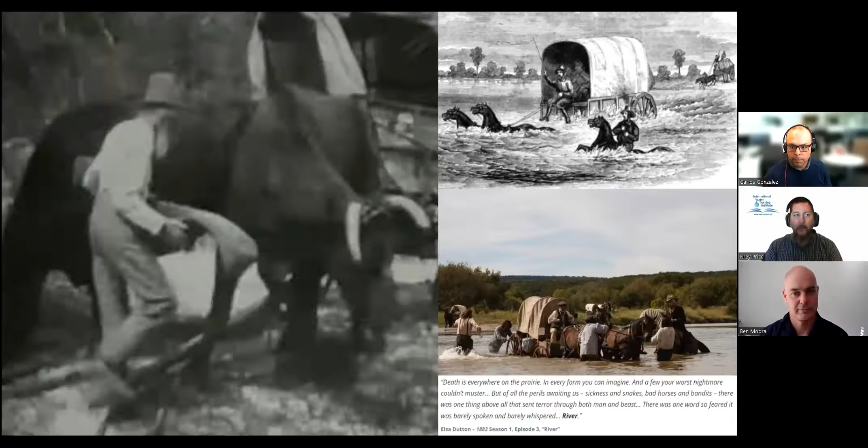Any other ones that you're aware of, please pop that into the chat line, and we'll add that to the resources for this website. It's not just vehicles - some people have the rule of thumb that if you wouldn't walk through it, if it's going to knock you off your feet, it could probably float your vehicle as well. There are actually some people who have volunteered themselves to test this.

Let's see, Carlos, do you have any questions you've highlighted here that you wanted to hit? I'd say more than we can probably get to in the next couple of minutes. Another question I got to ask is, is there any guidelines for different categories of roads on how much should be the flow of water over the carriageway or the ford to allow any vehicles to cross the road?

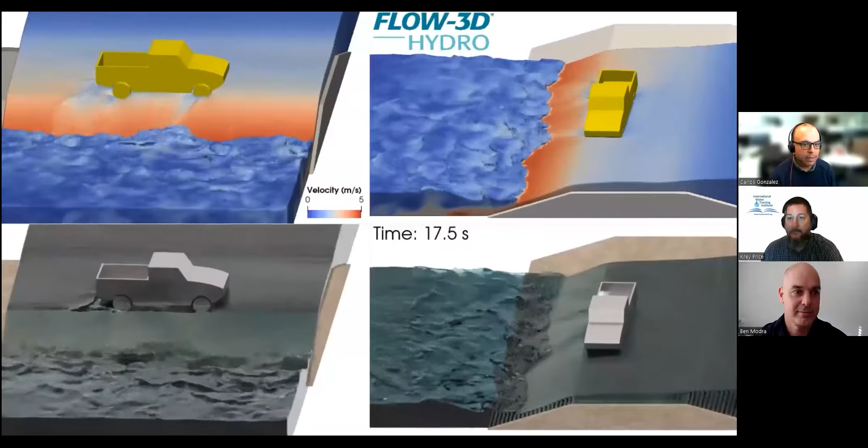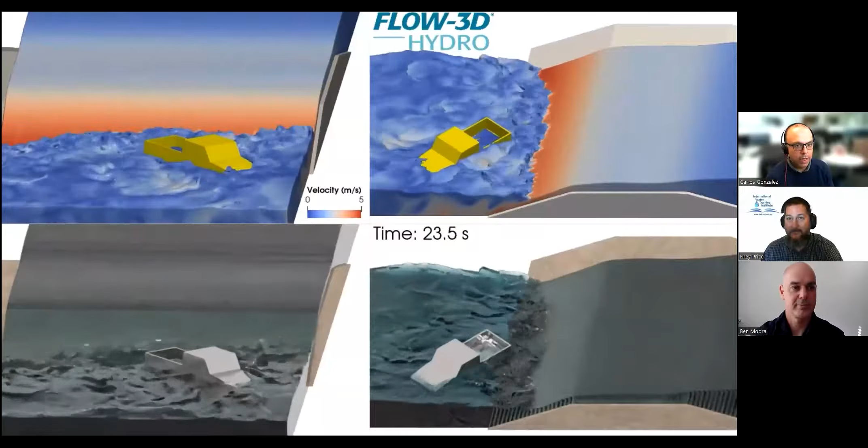Yes, and thanks, that's the message to get across. And it comes back to our poll question again - what it takes to float a car is not necessarily advocating that's the safe depth to cross. So that's kind of a message to get across. Ben, anything you wanted to cover here as well?

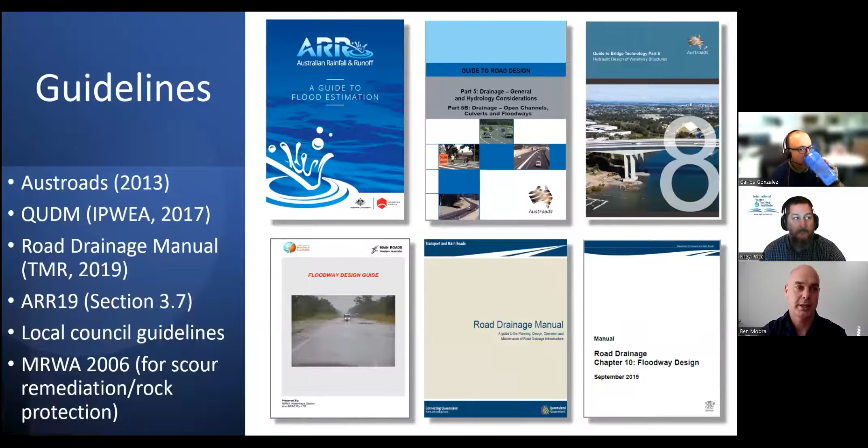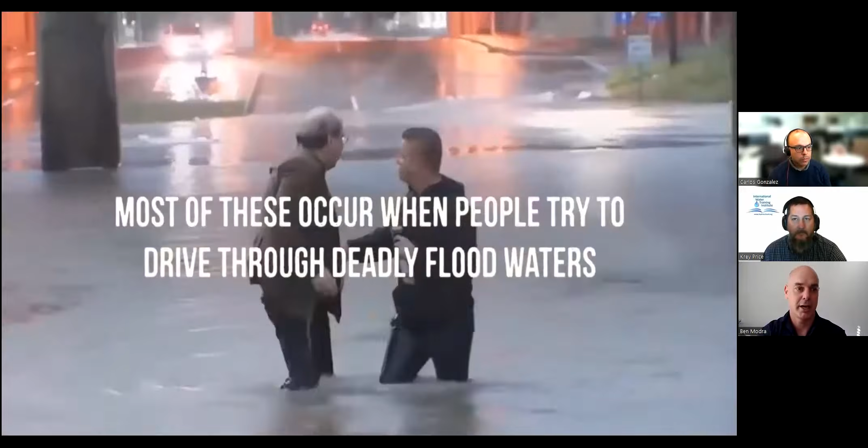There's some comments about improving signage and cameras on floodways so people can plan their trips. I think they're great ideas, and there's lots of work being done in that area, not just by myself and others here, but other parts of Australia working on getting that messaging right.

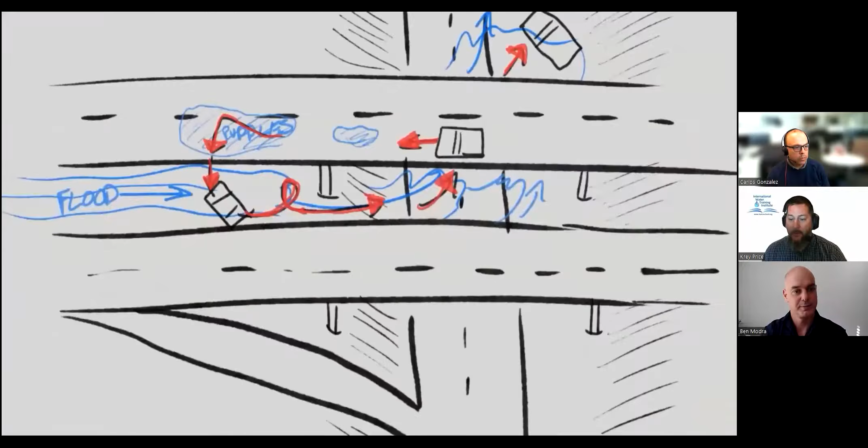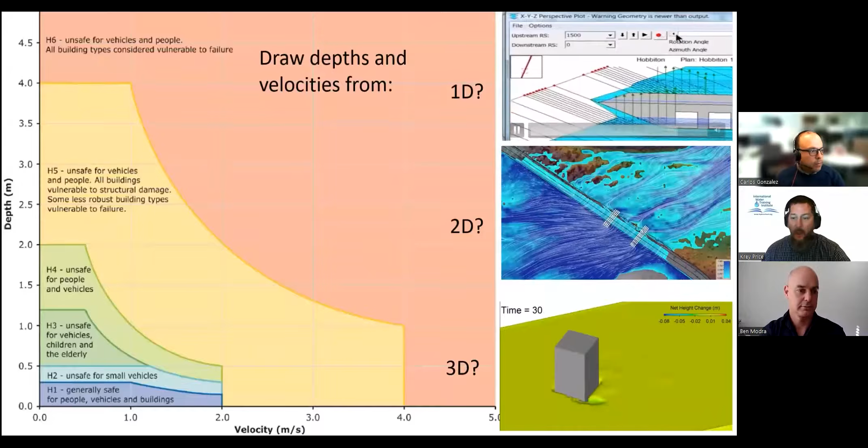The guidance probably needs to be updated in some cases. All of these resources I'm posting to this website called hydroschool.com/floodway. We've got links that we'll be posting for every resource we've touched on today, including the video clips, so you can see it in more detail.